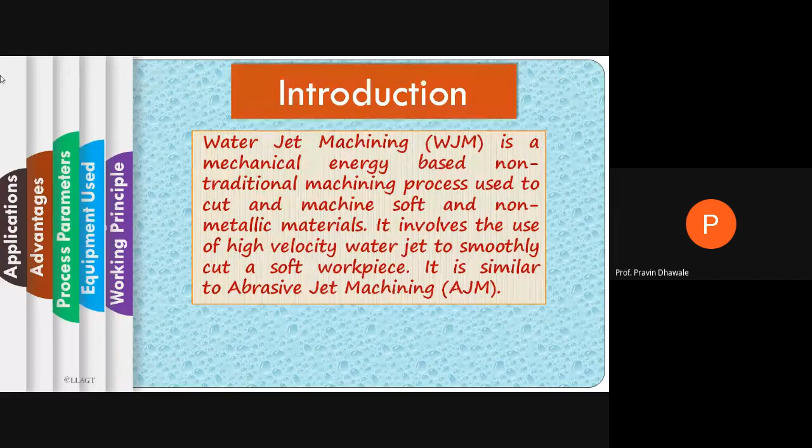Okay, so that's all about water jet machining. In short, the description of water jet machining: first, it is a non-traditional mechanical energy based process. Second, it is used to cut soft material as well as non-metallic material. And the high velocity water jet is able to cut this material very smoothly.

Now, what are the different process controlling parameters in case of the water jet machining? What is the first parameter? That is the stand-off distance.

What is the stand-off distance? It is the distance between the tip of the nozzle and the upper surface of the workpiece. Up to a certain limit, as we increase the distance of the tip of the nozzle from the surface of the workpiece, as that distance goes on increasing, there will be an increase in the material removal rate of the workpiece. That is, as stand-off distance increases, the material removal rate also increases, but only up to a certain level or a certain point.

Beyond that point, when you are increasing the stand-off distance, the water jet velocity gets reduced, and if the velocity gets reduced, it will impact the removal of material from the workpiece. That is, with increase in stand-off distance, no doubt the material removal rate from the workpiece by water jet machining increases up to a certain point. Beyond that point, the material removal rate decreases because the velocity of the water jet keeps on reducing.

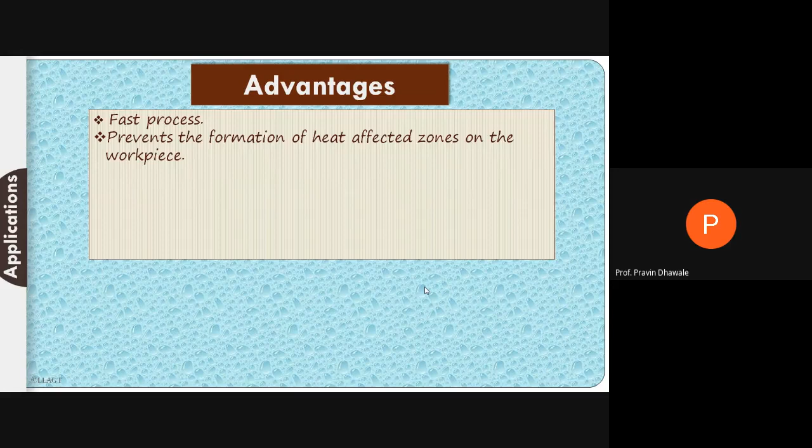It automatically cleans the surface of the workpiece. The same fluid acts as a carrier of the removed material from the workpiece, so there is no need for any other fluid or means to clean the workpiece in order to remove the material dug out by the water jet machining process.

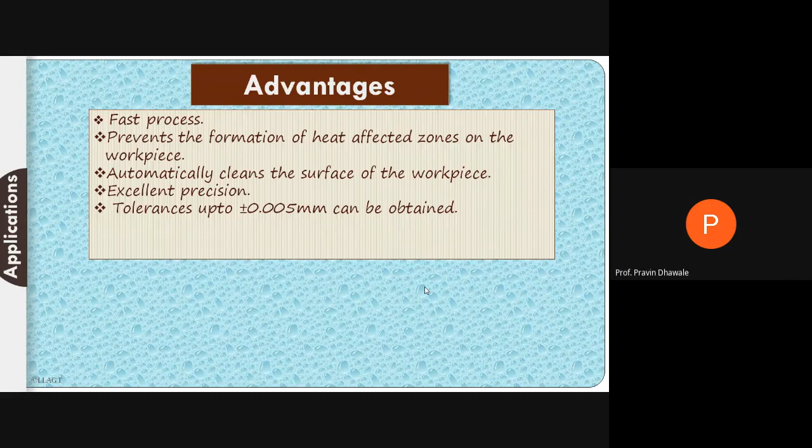Whatever accuracy or precision you get by using water jet machining, it will be more as compared to other non-conventional processes. The tolerance value obtainable is up to plus or minus 0.005 mm in case of water jet machining.

Water jet machining cannot produce any kind of hazardous or harmful gases during the process of operation, so this process may be called an eco-friendly process. Water jet machining is an eco-friendly process.

These are some of the listed advantages of water jet machining: first, fast process; second, it prevents formation of a heat affected zone; it helps clean up the surface of the workpiece; it provides good tolerance up to plus or minus 0.005 mm with excellent precision; and this process may be called eco-friendly because it does not produce any hazardous gases. So these are the advantages of water jet machining.

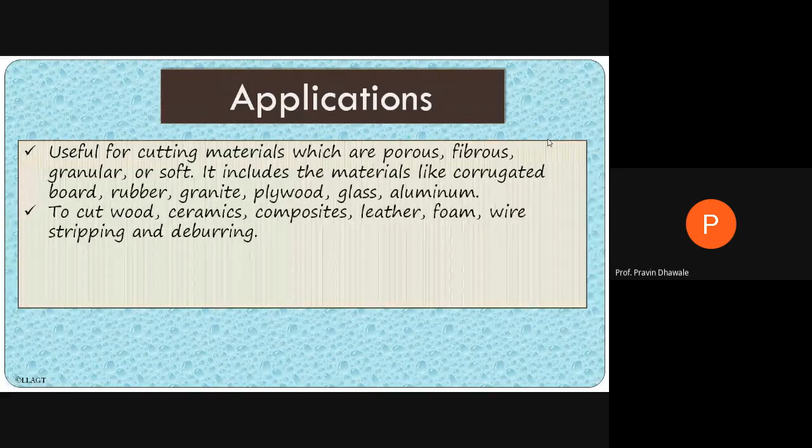What is the baseline? That material must be a softer one, or that material must be a non-metallic one, to cut wood, ceramics, composites, leather, foam, wire stripping, and deburring. These are certain applications, wire stripping and deburring, where we use the water jet machining process. Also, in order to machine or cut wood, ceramics, composite, and leather, foam material, we may use the water jet machining process.

The next point is related to some specified applications, like in aerospace and other similar industries. Cutting of asbestos is done by using water jet machining in order to minimize airborne dust in the atmosphere. In certain aerospace industries, to reduce the production of airborne dust, machining or cutting of asbestos is done by using water jet machining.

It is used to cut fiberglass and polyethylene, which are used in certain automobile applications or in the manufacturing of automotive parts. Machining of such parts is carried out by using water jet machining. So write down these applications of water jet machining in the field of engineering.

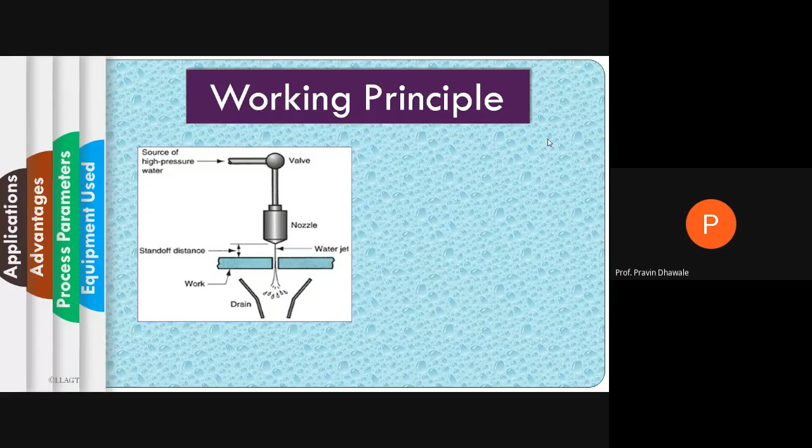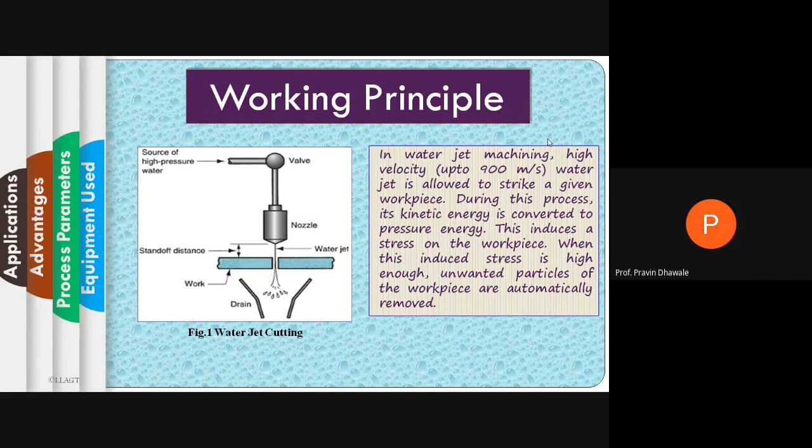How this cutting process is carried out in case of water jet machining, using high pressurized water jet which is allowed to flow through a nozzle, converting high pressurized water into high velocity water jet, and by using that high velocity water jet we are cutting the workpiece. Also, we discuss about the experimental setup for water jet machining, which has different parts and components like reservoir, intensifier, pump, accumulator, nozzle, direction control as well as flow control.

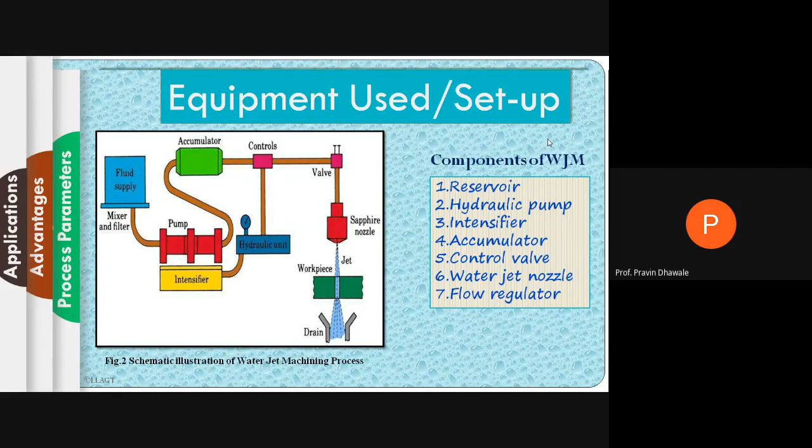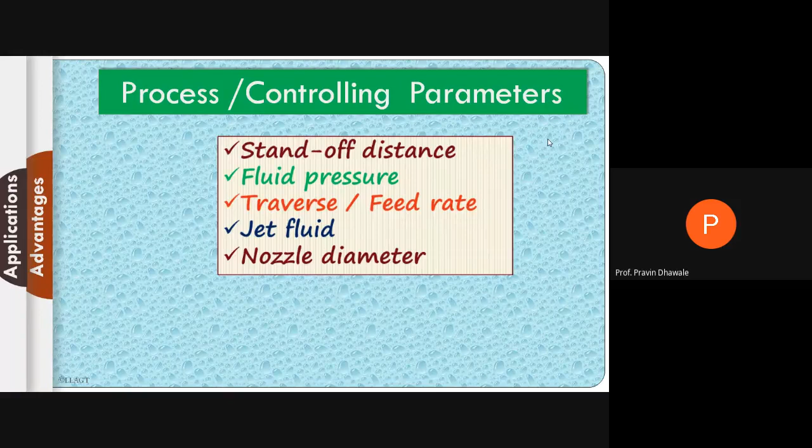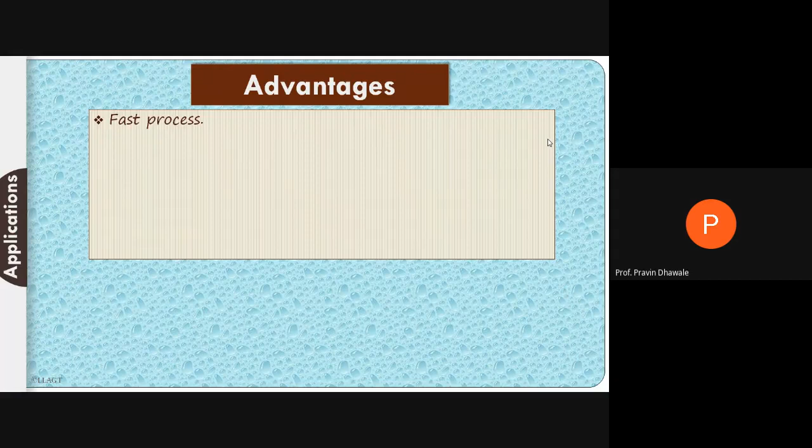This is a very important parameter point from the water jet perspective. What are the different process parameters used in water jet machining, and what is the impact of each parameter on MRR, that is material removal rate, in case of water jet machining? What is the effect of stand-off distance on material removal rate? What is the effect of fluid pressure on the performance of water jet machining process? How do fluid velocity and nozzle diameter affect the material removal rate in case of water jet machining? And lastly, we discuss the different advantages of this water jet machining.

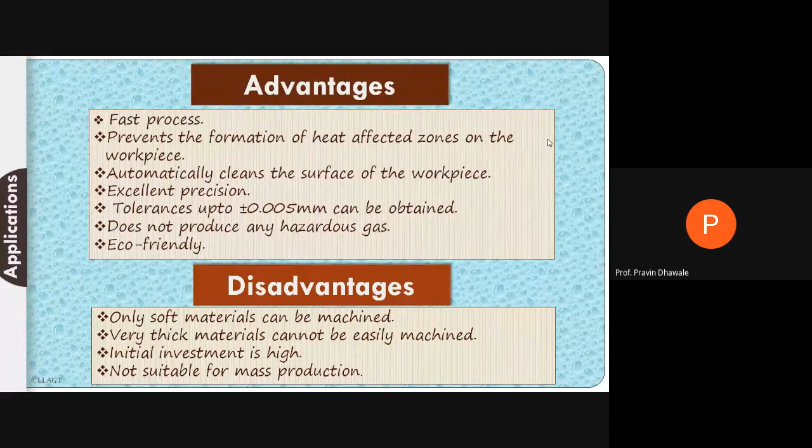Also, we discuss and give insight on limitations and disadvantages of water jet machining. And at last, we cover the applications where we will use water jet machining.

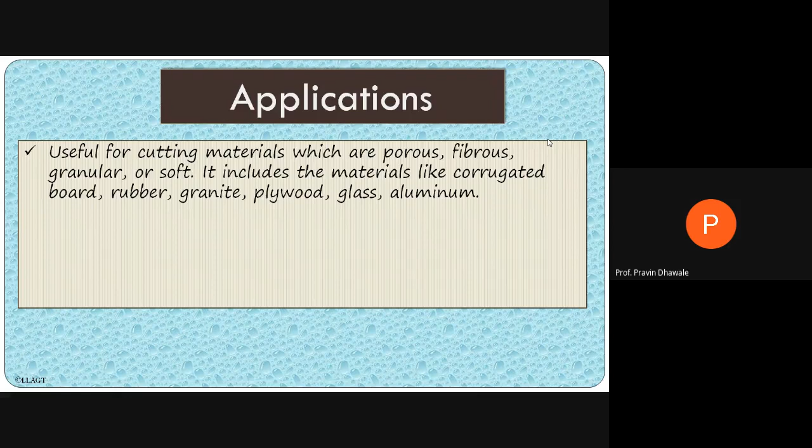Why do we study this water jet machining, a non-conventional or advanced machining process? We must require certain applications where conventional machining has certain limitations. That's why we go for non-conventional machining processes, and among mechanical energy based processes, we study water jet machining. The ultimate answer to study water jet machining is when you have to machine certain soft materials and non-metallic parts. At that time you go for water jet machining.

These are certain applications of water jet machining.

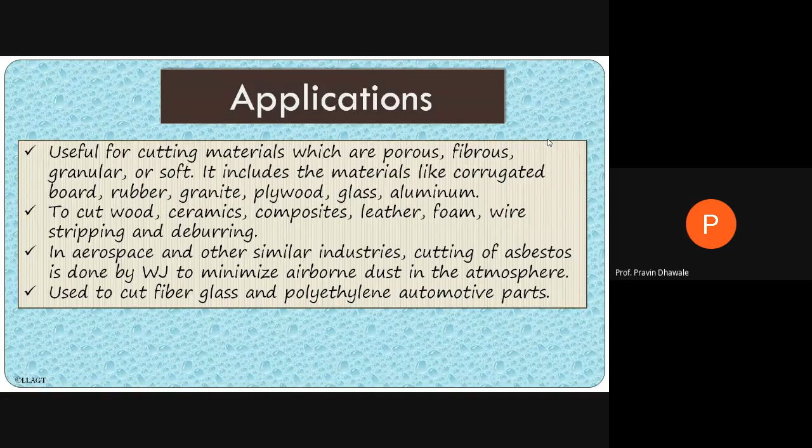I think the concept of water jet machining will be well understood by each of you. Then we will discuss the differentiating points or certain similarities and differences between abrasive jet machining, which we studied earlier, and water jet machining, which we studied right now. What are the differences or similarities found in case of AJM, that is abrasive jet machining, and water jet machining?

Abrasive jet machining, water jet machining, abrasive water jet machining, and ultrasonic machining - right now we have studied these two processes, these two are remaining. Whatever these four processes are concerned, they directly utilize mechanical energy to gradually remove the material from the workpiece by the action of erosion. So we may say this is a similarity point in case of all mechanical energy processes.

Abrasive jet machining and water jet machining utilize mechanical energy in order to remove the material from the workpiece by the process of erosion. This will be the similarity point.

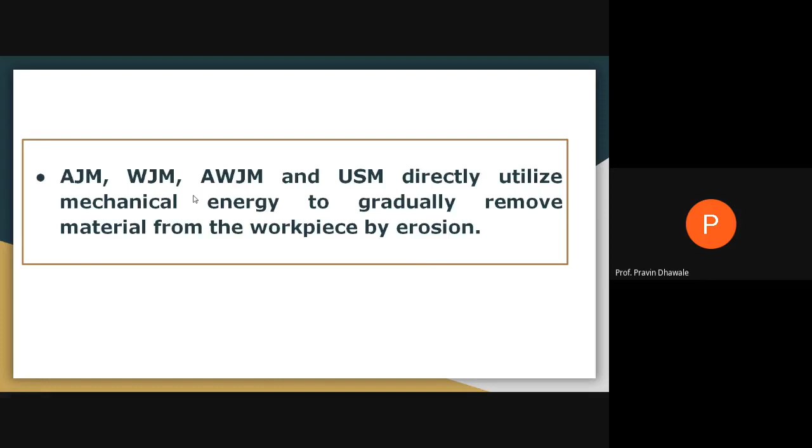So at the tip of the nozzle you are getting a high velocity abrasive jet, and this high velocity abrasive jet, when it strikes the surface of the workpiece, will remove the material from the upper surface of the workpiece by the process of erosion. Why is this happening? Because continuous bombarding of these abrasive particles at a particular location may cause digging or stress induction at that particular part, and because of that, erosion action takes place and material is removed from that specific part of the workpiece.

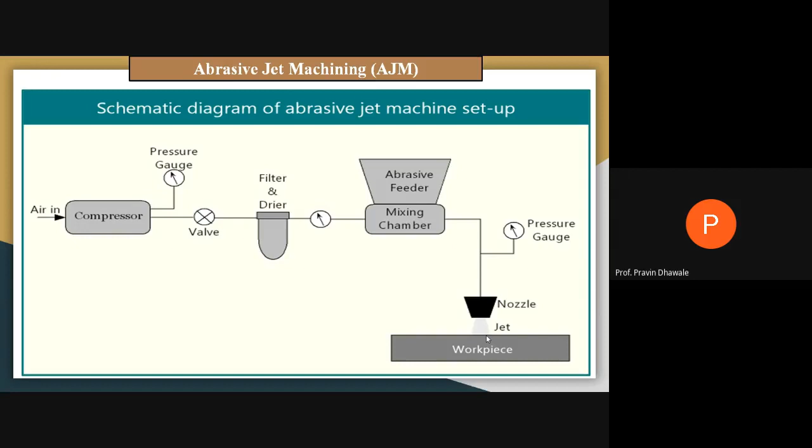This is a schematic diagram that we have already studied in case of abrasive jet machining. In abrasive jet machining, abrasive particles are allowed to impact or impinge on the work material with very high velocity, and this high velocity abrasive particle removes material by micro-cutting action as well as brittle fracture of the work material. This will be the working principle.

See here, this is the workpiece, this will be the nozzle, this will be the diameter of the nozzle. Through this nozzle you are allowing high velocity, high pressure abrasive particles to pass. When it passes through this nozzle, you get a high velocity jet, having velocity up to a range of 300 meters per second, and the diameter of the nozzle may vary from 0.2 to 0.8 mm or maximum 1 mm.

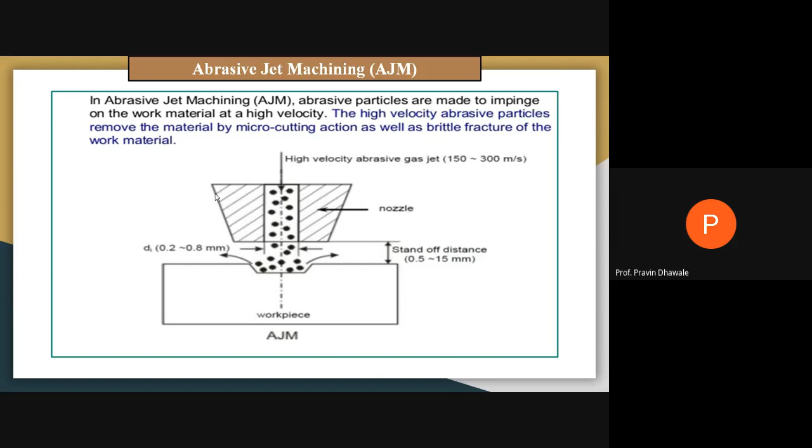And the distance you have to maintain between the upper surface of the workpiece and the tip of the nozzle may vary between 0.5 to 15 mm. That we have studied in an earlier lecture focused on abrasive jet machining. In case of abrasive jet machining, material is removed by the process of erosion, which is nothing but removing material by micro-cutting action with a certain amount of brittle fracture of the work material.

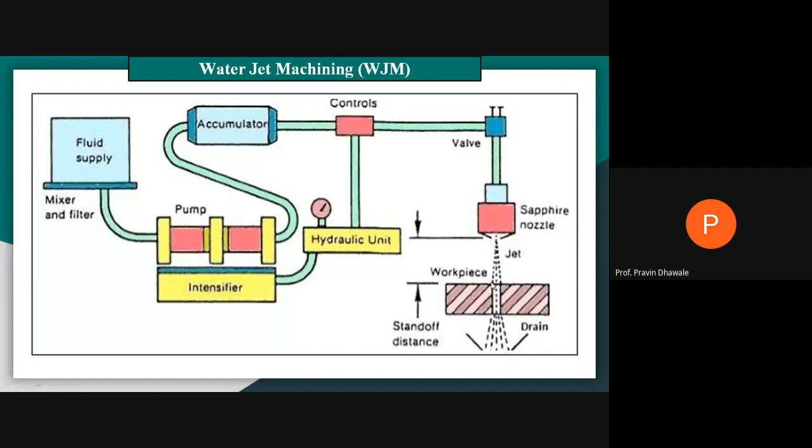So, in short, when you are discussing the similarities and differences between abrasive jet machining and water jet machining, the similarities, as we discuss, will be shortlisted in this slide.

First similarity: both abrasive jet machining and water jet machining are non-traditional machining processes, also called non-conventional machining processes or advanced manufacturing processes. However, none of them is considered a hybrid process, so it is purely a mechanical energy based process. No other form of energy is utilized to carry out the machining or material removal process. So it may be called a non-hybrid process.

The second point is related to the type of energy used to perform the material removal operation of this non-conventional machining process. Abrasive jet machining and water jet machining are both mechanical energy based non-traditional machining processes, and they directly utilize the kinetic energy of the jet - it may be an abrasive jet or a water jet, respectively. That high velocity jet of energy is utilized to remove material from the workpiece.

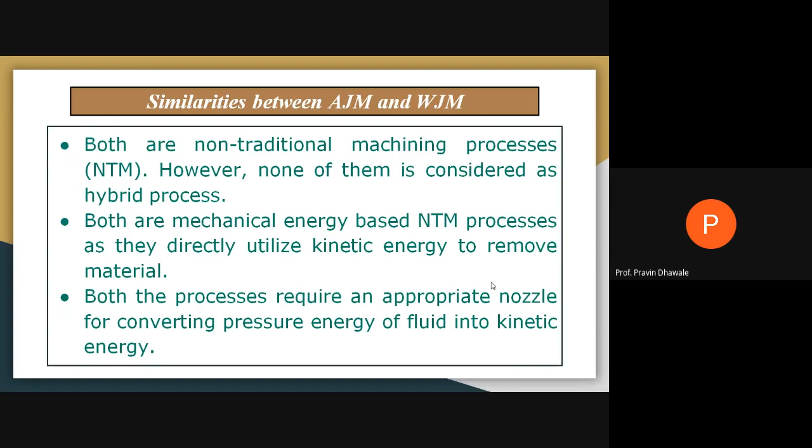The third point of similarity is that both processes require an appropriate nozzle. In both processes, we require the appropriate shape, size, and material of the nozzle for converting the pressure energy of a fluid into kinetic energy. In abrasive jet machining, you supply high pressurized abrasive and air mixture at the inlet of the nozzle, and in water jet machining, you supply high pressure water at the inlet of the nozzle. At the outlet, in both processes, you get a high velocity jet - abrasive jet or water jet respectively. So in both cases, we require the nozzle to convert fluid pressure energy into fluid kinetic energy.

The performance of abrasive jet machining or water jet machining does not depend on electrical and thermal conductivity and chemical inertness of the workpiece material. This point shows the similarity with respect to the properties of the workpiece - electrical conductivity, thermal conductivity, chemical inertness. So whatever material we are using in abrasive jet machining and water jet machining, there will be no change in the properties of the workpiece.

Next point: none of these processes is associated with burr formation and thermal damage. Burr formation means while removing material from the workpiece, a certain amount of material remains along with the cut part - this is called a burr. So formation of a burr and thermal damage due to a heat affected zone is not possible in case of abrasive jet machining.

Last point of similarity: both processes can be integrated with CNC machines in order to have sufficient control and precise delivery of the jet, whether abrasive jet or water jet. That is, both processes can be computer numerically controlled; CNC systems can be used for abrasive jet machining as well as water jet machining.

Yes, Sonali, do you have any query? No, sir. Hello? No, sir. Yes, please. No, sir, no inquiry. Okay, okay, thank you.